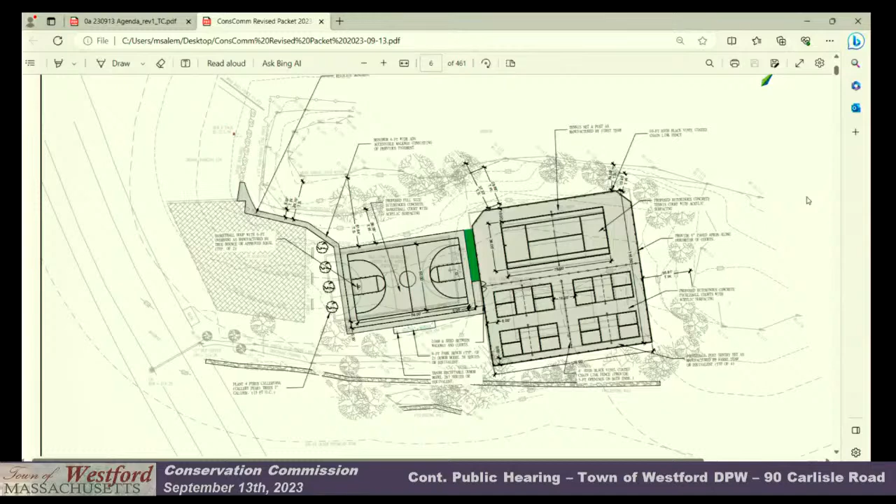We would ideally like to do it here, but there's just not enough room. Unfortunately we're going to remove these trees, but fortunately we're going to replace them, and this is the proposed new location of the trees, if that works for the commission. Those are relatively the extent of the changes.

On C6, the next sheet, the only change is that we modified the elevation at this corner because now we're pulling back a little bit to the original location, so that elevation number was changed on this plan. Lastly, we identified all the distances to the wetlands. You see a TW for to wetlands and a TS for to stream, and those measurements are from the closest point at each location, which was also at the request of the commission, which was a good request.

I think I've covered really the changes requested. I don't know if the commission had any questions.

So I have one. We had talked about maybe doing 3 pickleball courts before and reorienting because we were concerned about how close it was to the flag up in the corner here, and I don't know if that had been reduced since the last plan. Looks like it's still 19.5 feet from the edge of the chain link fence to one of the flags. Am I right? To the stream. Wasn't that where we were before, or were we closer? I think it's closer, if you look on the plan.

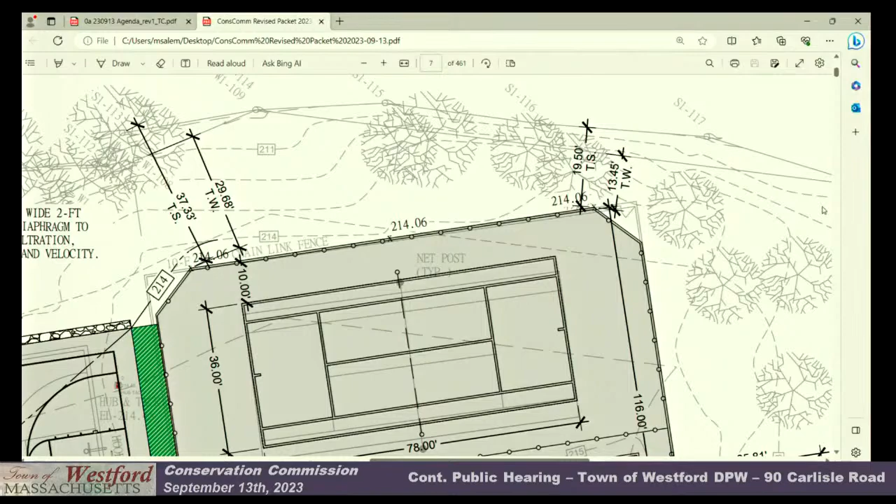The existing courts do come to a point, a 90-degree corner, so that certainly is closer to both the wetland and the stream. Is that paved court right there the existing one? Yes. The light gray is your existing court, and we did shift this down so that the new court matches. It's hard to see on this scale, I apologize, but we've clipped the corners of the court to try to reduce impervious surface on that side.

The 4 trees being planted, were those the Callery pear trees? Is that what you're planning on putting there? That's what was suggested, that's what was on our plan. We have talked about trying to identify species that are in the town's invasive and tree management plan as potential species we could use. This was what was recommended, but those are a non-native species, so generally we'd like to have a native species put in there. Okay.

Is there a particular species that the commission would recommend? What are the ones being cut down, maples, oaks? I don't know offhand, but Matt, do they know?

Do we have a list of native species? At this point, does the commission have thoughts about whether we'd want a deciduous or an evergreen tree, in terms of screening and wildlife habitat? That would probably be better for maintenance, since you're going to have leaves everywhere if trees are that close. Yeah, maybe some kind of evergreen.

Or let something make the choice, as long as it's at least indigenous. In working with our resident pickleball players, they do like the proximity of the trees to the courts because they say it helps keep the wind down, which can impact play. So I think an evergreen, over time, will help establish that barrier.

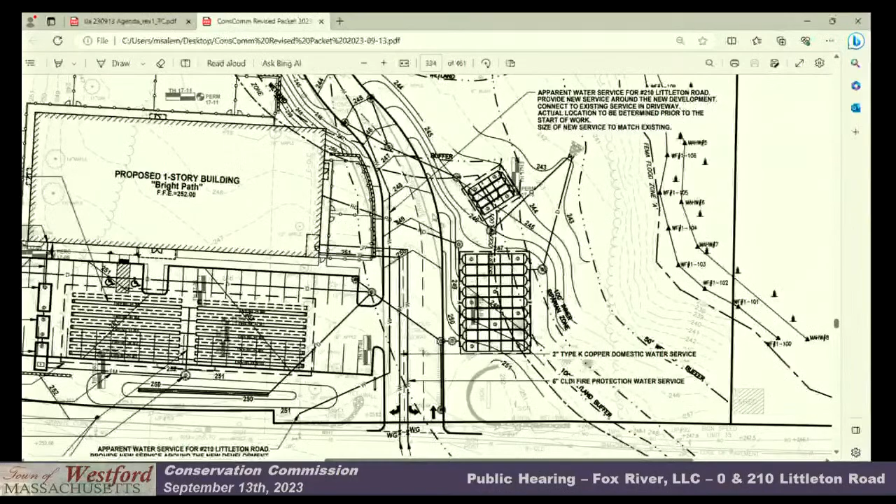Can he shift it and not do that? Is it possible to either shift it or replant closer to the wetland resource, or further to the south, in this area? Just explore whether there's the opportunity to achieve the same infiltration and be able to put it there and save the trees.

What about if we were to leave it where it is, but then plant new trees between the infiltration system and the buffer zone, right through here? That's where those slopes are, we could do it at the bottom of the slope.

Whichever the commission would prefer. We can look at moving the system closer and leaving the trees, or would you rather leave the trees that are there? They certainly are mature trees. I don't have a preference one way or the other.

Well, maybe we can explore the opportunity. We'll look at it, look at the trees, see what we can do, and propose something. I think what would be helpful is to have an inventory of what those trees are - the type of tree, the caliper, so that we know what we've got.

They are labeled at the species level, you know - apple, oak, pine. So it would be mapped by size: 20-inch pine, 12-inch maple, 16-inch maple, and a good mix of more mature sized trees. Those are good trees.

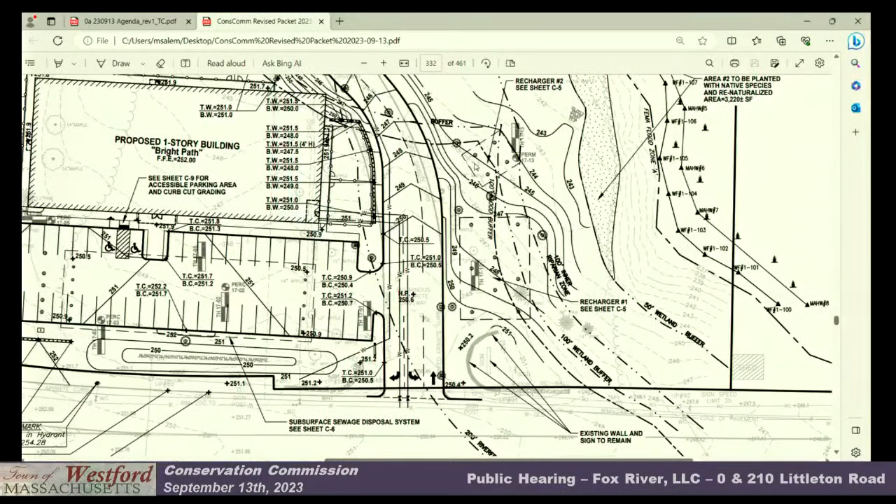It begs the question with some of the larger trees - if we're moving the rechargers, can we move it far enough away that it's not going to impact the root network for some of those trees? That's something else we have to look at too.

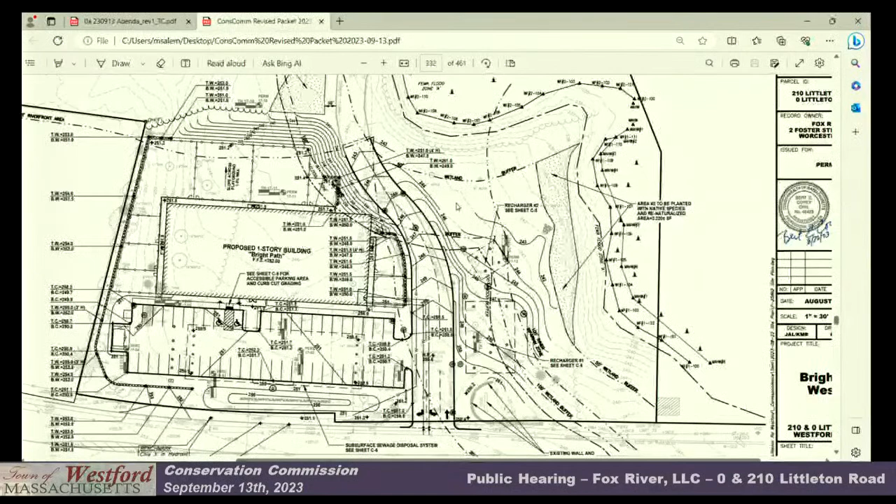In terms of when you come back to see us next - I believe we're slated to meet with the planning board on October 2nd. I know there's another Conservation Commission hearing between that meeting and tonight. I think we should probably wait until after we meet with planning for October 11th. Yes, the meeting following would be October 11th, and if needed, we can continue from there as well.

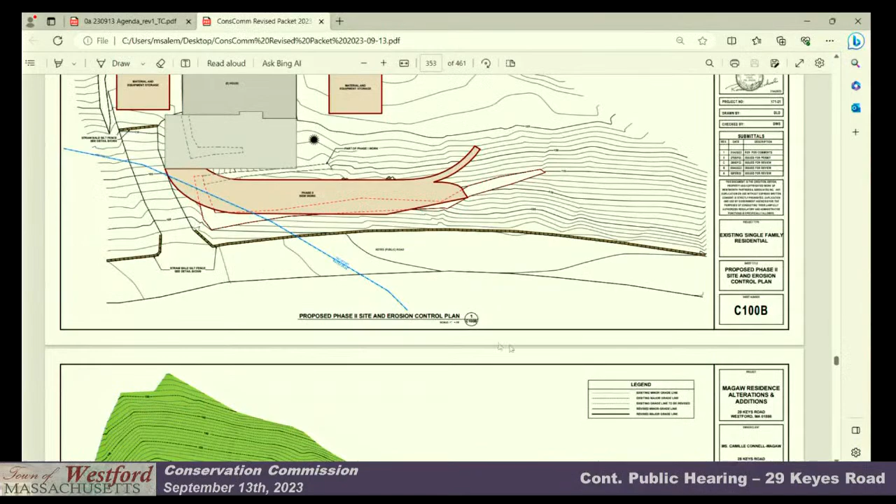It is not going to be a poured concrete wall, but rather it's a block wall with a finished face on it, or a stone face, finished type of face on it. And so that gives you all the details of how this wall will be constructed.

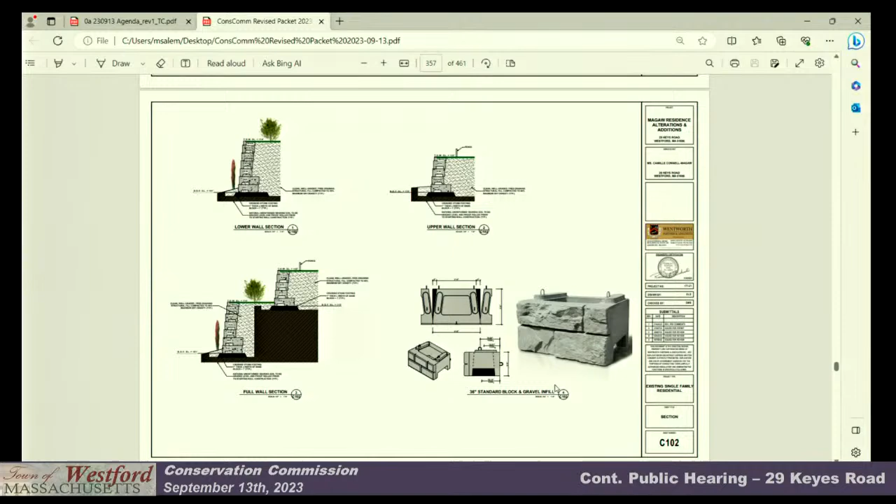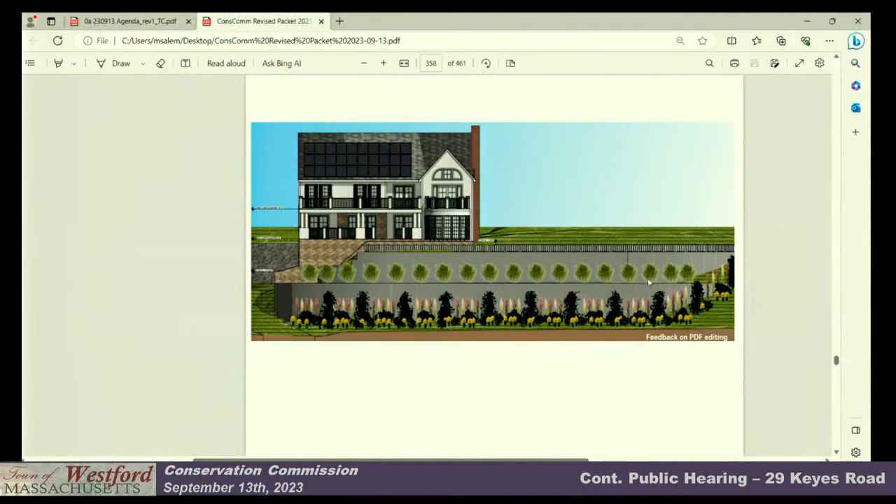We did update and revise the landscaping plan, which I believe was in conformance with what the commission was looking for. Did we provide a breakdown of those plans? Yeah, there's a breakdown of that. They're actually called out on another sheet that I think didn't get sent through to you. Oh, there it is, sorry. There it is, great. Yep, so they're all called out. So there's some more, each different details, tree and type of plant and bush.

I did also, Matt was kind enough to send us a draft of orders in the event the board is ready to do that. We've reviewed it. My client had one question concerning the phosphorus prohibition. She told me her only lawn is in the back of the building, and so she was wondering why she would be restricted. I did explain to her that it's a town-wide program. We're trying to restrict phosphorus, and while the lawn might not be in the buffer zone, clearly it's uphill of the resource area, so anything you put on your lawn could move. So other than that, she was fine with the conditions as proposed, and Dan and I are here to answer any other questions you have or provide any more information you want.

You had some other, could you slide it down? I think there was another picture or two you had after this one. No, not this one. I think, there you go.

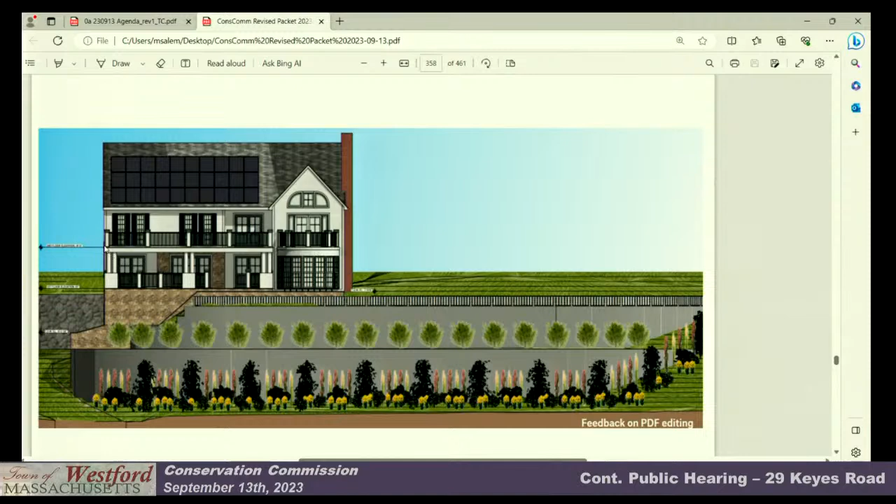If it were, again, I think it was included in the previous, with the original opening of the public hearing. The plan utilized for the variance in 2021, 2020, 2021, just showed the addition, the front addition and the porch. So the planning board has not seen the modification, I think it would be the zoning board would have.

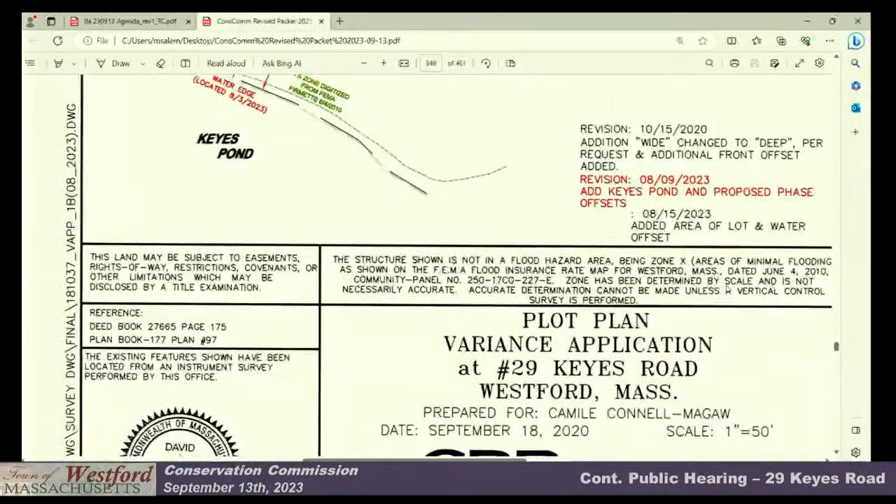But I'm just saying, at the planning board at the time, when they proposed what was being done, the improvements on the front of the home, there was no discussion at that point with the planning board for these retaining walls? The zoning board of appeals - if I recall, the zoning board of appeals plan, which this is based off of, this plot plan's based off of, the original submission that they reviewed was this grade area, the proposed porch, and I think it was just the porch and this addition.

Because there were two encroachments into the front yard setback as proposed, and then there was that proposed block wall right there. That wasn't included. What the zoning board of appeals reviewed was this grade-in area here and the circular addition. The proposed concrete, this phase one wall, nor the two additional block walls were included.

Variance for front yard setback? In the relief for the front yard setback. So, with the two walls that are in essence being reconstructed by this proposal...

Does the fact that the new walls are slightly different than the original walls play into needing a front setback relief from the front lot line? Relief from the front. Yes.

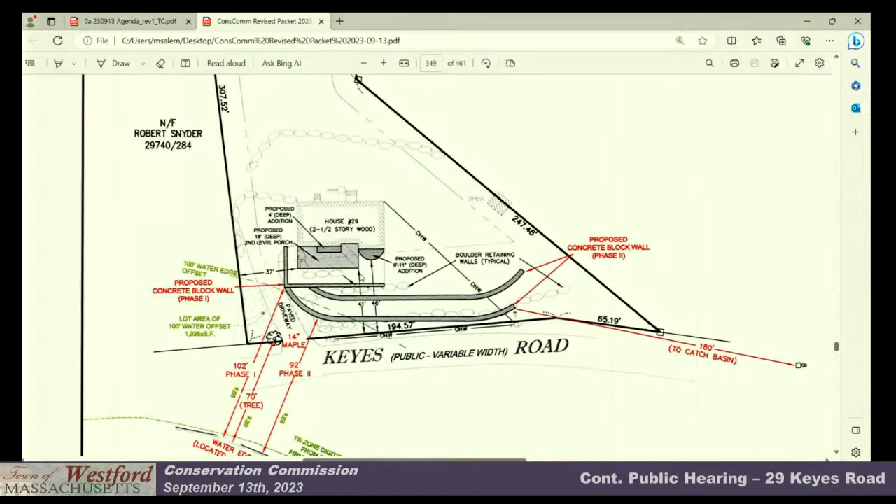But where the phase one proposed concrete block wall is, is there anything in that location today? There's a retaining wall, stone, boulder walls up in this area that create what was intended to be a staircase that comes from the driveway up and brings you to the front door of the house.

But the stairs are non-existent. It's just steeply sloped grade with grass on it right now, and then the boulder stone walls are there in this area.

And then this wall here is really part of the patio and porch addition off the front of the house. So this is like hardscape landing off of a stair, shown on some of the other sheets, and then you continue to step down and make your way down to the driveway. So that's the one right there.

So this is that L-shaped wall here, in order to break grade and provide the structure to build all this up against and bring the steps down, then a flat spot and a landing, then slopes down and meets the driveway here by the garage doors, level with this space. That's all in phase one, and that's the upper boulder walls there that would come out in phase one. The lower wall stays at the end of phase one—it doesn't get touched as part of the first part of the work.

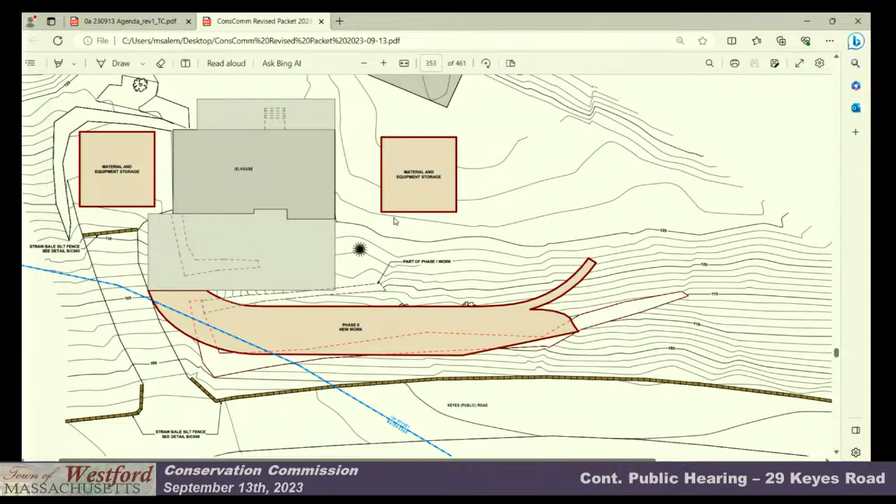While we're here, all these plans show Keyes Public Road. Are the edges of that the edges of the right-of-way or the edges of the paved surface? This right here would be the edges of the paved surface, right along what we're outlining here. Now, Matt, can you go to the final?

My concern is looking at how close to the edge of that paved surface a lot of that landscaping is, in terms of snow being plowed, pedestrians, vehicles maybe needing to pass. I'm wondering if this design really provides sufficient space between the edge of the planting and the edge of the pavement for cars, pedestrians, whatever have you. Yeah, it concerns me that the plantings come that close.

There's some space there existing. So this is a proposed idea of what you could do with some plantings there. I know from last time some of the conversation was around trying to beautify the wall, if you will, with plantings. So that was a preliminary stab at doing that. She doesn't have a final landscaping plan at the moment, but it would be along these lines.

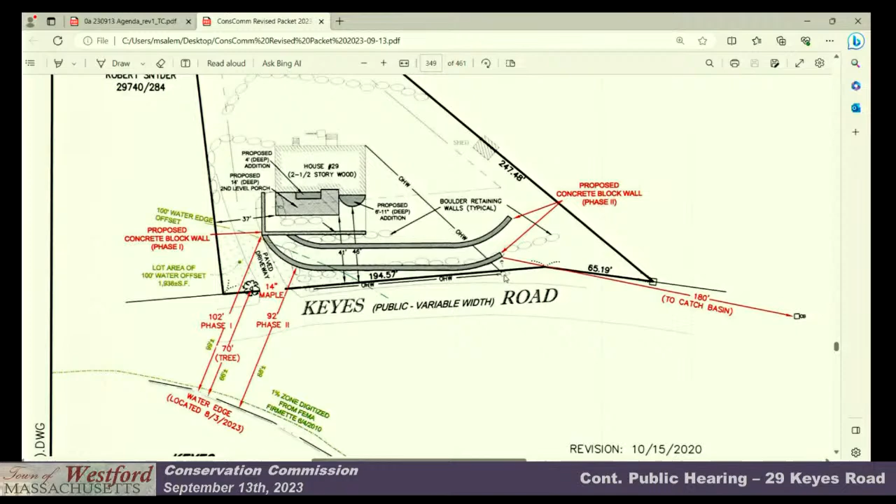So plantings over here at this end of the wall would have to be worked in to obviously not go over that line. And this is where we're really looking for a plan that can be handed to a contractor who's going to manage this work, and that person has the information they need to deliver the project the way we've all discussed.

Looking at a lot of these plans, there's not the detail that gives me a lot of confidence that you hand this to a contractor and they're going to be able to deliver the project the way it's being discussed now. This is where the plan of record that the contractor is going to use becomes very, very important in terms of knowing where they plant, knowing how things are structured.

The other thing that concerned me - Matt, if you can go back to the end of phase 1 - is we understand that there's going to be a time delay between the end of phase 1 and when phase 2 starts. I look at these slopes, I look at where material and equipment is going to be staged, and I am very concerned about the stability.

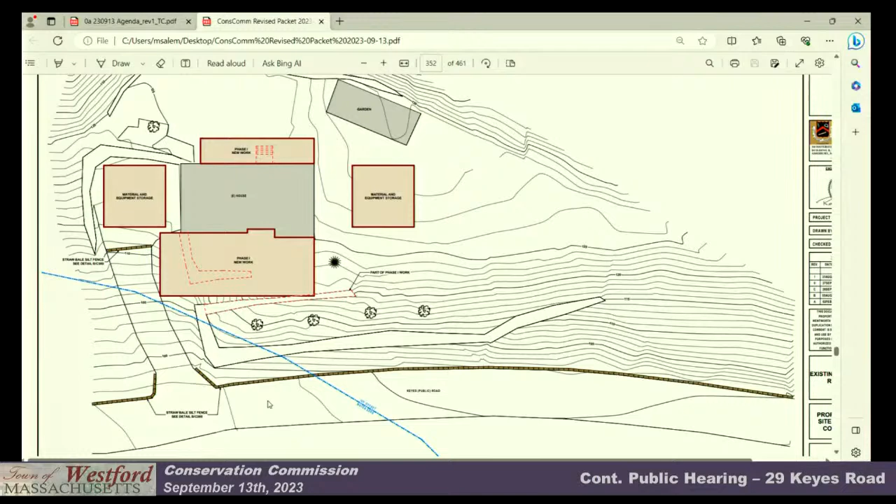If we have significant rain events, if we have the kinds of things that we've had happen on this hill, I don't really want to rely on a series of control measures along the edge of the road to really prevent a catastrophic release of material going into the pond or into the roadway or wherever it goes. It hit the neighbor's house before it hit the pond.

One of the things you hit upon is, it says in order of conditions number 32, it talks about the disturbance during each phase. And one of the questions I had at our last meeting was, okay, how are you going to do this? How are you going to remove those boulders? How are you going to build the blocks, put the blocks up? How are you going to stabilize that? How are you going to move forward as you do the project?

This isn't answering my question. This is just saying, hey, we're going to come up with a plan that can be approved by the commission or the agent, but I have to approve that as part of the order of conditions and approve the project. I want to see that before I approve the project.

That's a good point, because you had brought that up at the last meeting - when we're taking out the boulders in a 10-foot high wall, what is going to be the step-by-step sequence that a contractor is going to do to make sure that all the soil behind that stays in place, that we don't have a catastrophic failure? It's like when we cut into a road, when the town does that, they talk about the steps: we're going to do this, we're going to put this there, we're going to backfill, we're only going to go so far.

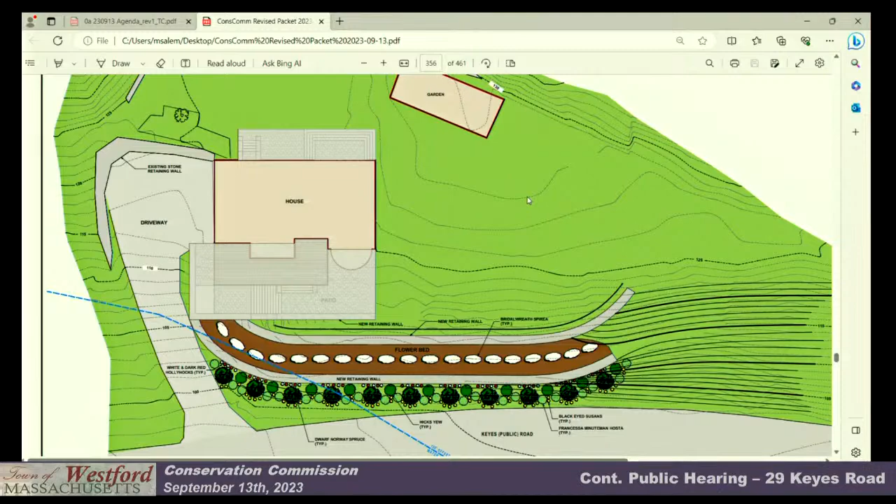I think I have a pretty good understanding of what you want us to do, and I think we can do it. So, we'll see you in 2 weeks?

Will that be enough time for you? We can certainly continue it if we have to. I think Dan and I can sit down and draft most of this up. I do want to get some additional information, and I'm sure we have it, we just want to show it better, and that is the right-of-way versus the pavement versus the property line.

So we can look closer at that landscaping, and maybe we give Steve a call and just see what the DPW thinks about that and what they want to do. But it would be good to do it before.

You guys will have to understand, though, that if Steve comes back and says he doesn't want any big trees in there at all, if you can help it, it's your property. We will have to back down on the trees down there and talk about putting in something more conducive to what they probably want trees somewhere else, so think about that.

Well, but if the concern is screening the wall, okay, maybe the screening of the wall needs to be reconfigured to meet the requirements of what DPW's criteria are.

Yep, that's what I mean. Looking at what I've seen, I do think there's room to get some trees up against that wall, which would do the best job of screening it, and even if you put in a 7-8 foot tree to start, it's going to have instant effect, it's not like we have to wait 20 years for a tree to grow to give us some buffer. An 8-foot tree against a 10-foot wall is really going to break it up right away, and maybe the species is such that it won't grow to 20 feet.

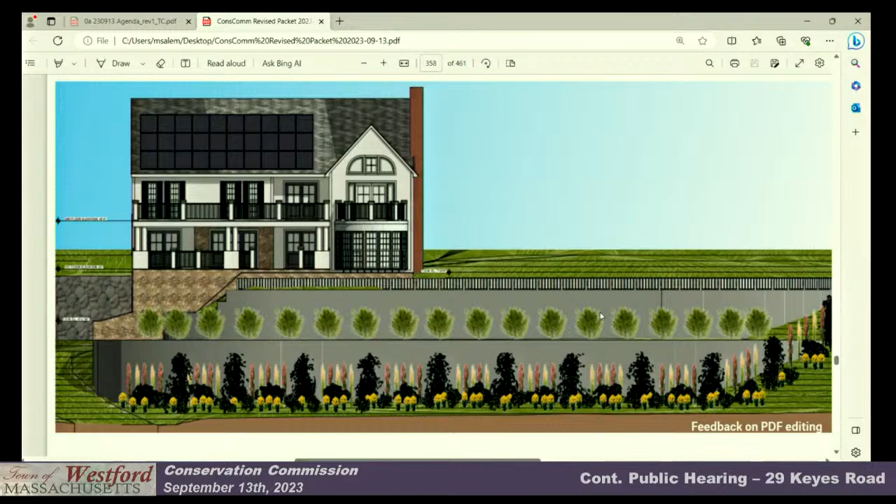What was there, some variation, sort of Norway spruce? The only one listed that's native is the black-eyed Susans. All the other ones are non-native invasives. Well, then we need to revisit that. Non-indigenous, not invasive. Yeah, I'll take a look as well.

Okay, we'll address that. I have enough to think about. All right, we got a lot to do. Any comments or questions from the audience? Welcome back, Doug. That's great.

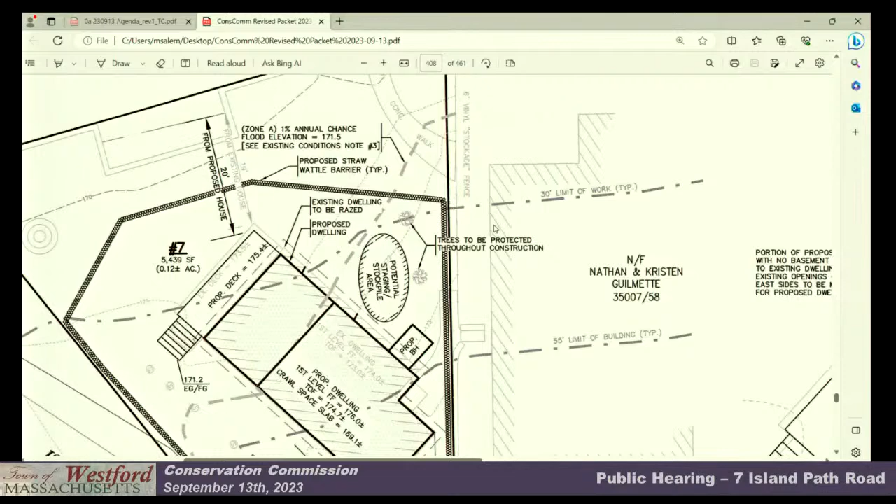So again, the existing building is proposed to be removed. The homeowner would like to update the house to be more up to date with current building code standards, and per conversation with her site contractor and the building commissioner, they're both of the mind that the most feasible and best approach would be to demolish the house in place and then construct the new house in the same footprint. The existing house would be removed, and then a new foundation wall would be installed within that same footprint.

There's an interior foundation wall, so there are 2 separate crawl spaces over here. This one to the south would be a little bit deeper and provide more storage space for the owner, but this area would be a designated flood storage area. The existing house has several openings along the northerly and easterly side of the foundation to accommodate flood waters from the flood zone A, so we would be trying to keep this same practice in place. The foundation proposed would have openings along the northerly and easterly side within the floodplain as well, and this area would just be for that flood storage.

No vegetation removal proposed. Is it open, is there a concrete slab underneath? There would be a slab underneath, and the openings would have a lattice in front of them.

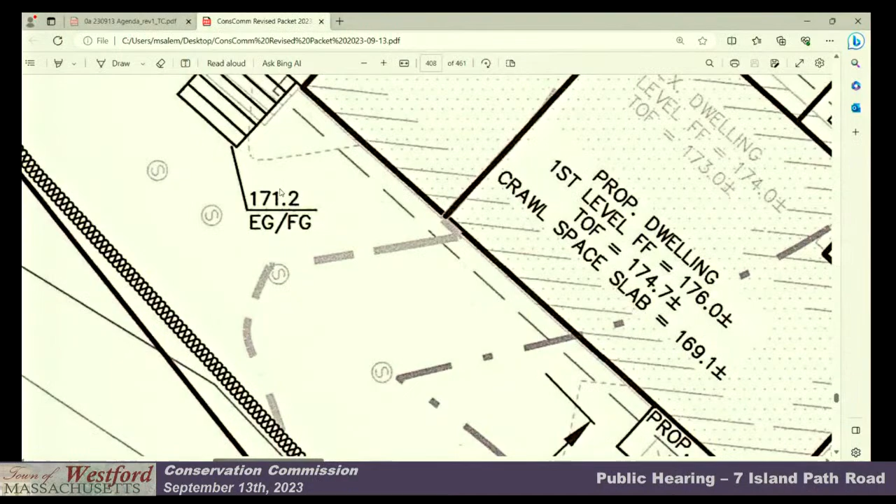Correct, and I think it is. There, you go. There's covers that were identified. I'm like, there's something, I'm sure they showed it.

You're going to be able to use that staging area up there? You're going to be able to drive around the house with construction equipment? You'll be able to come in here, but you won't want to drive over your tank, right? Or, I guess, there's actually enough space from the top where the porch is, I would think, to be able to get around to that top area. Yeah, in that area there.

Yep, I mean access could be here as well. But, similarly to the previous public hearing and discussion, this could be a laydown area for lumber, light stuff, materials, or when there's no house in the way.

I'm fine. I just have, as Jim alluded to, where the preliminary floodplain flood insurance rate maps have not been adopted and are not yet effective, if the building is constructed prior to the adoption of those maps, they would need to construct it to the effective maps code. So while it is a more conservative approach, it does comply with building code if work was to occur over the winter.

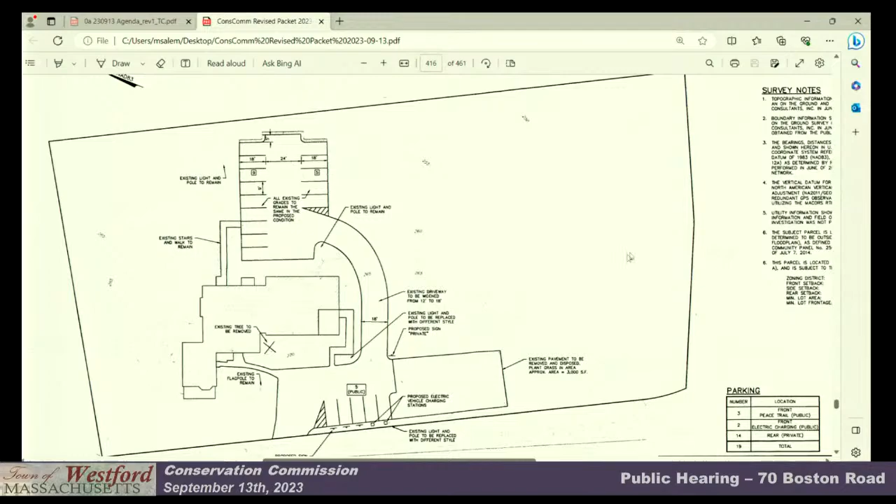Although the work will be entirely interior renovation with no new construction on the land, the Director of Land Use Management asked us to have a new site plan done because the last one was dated 1993. In doing that, without my knowledge, Land Tech suggested this new drainage device at the rear of the existing parking lot to utilize best management practice and control runoff. But it does intrude 10 feet into the 100-foot buffer zone. At your meeting last month, you asked that we come back this month for a public hearing with your input and public input, and your consideration of our request for determination of applicability, which brings me to you tonight.

The two things we did ask Land Tech to do was to reflect that we will be taking out a substantial part of the parking lot on Boston Road, which reduces stormwater runoff back down the hill behind the building. To be perfectly honest, I defer to you and to Land Tech as to whether this drainage device and the 10-foot intrusion into the wetland is a better way to have this property. We will do it if you suggest it. We can certainly live without it, because it's been that way since 1865, but the parking in the back has only been there since the 1994 renovation. So I turn to your expertise as to how we should proceed from here.

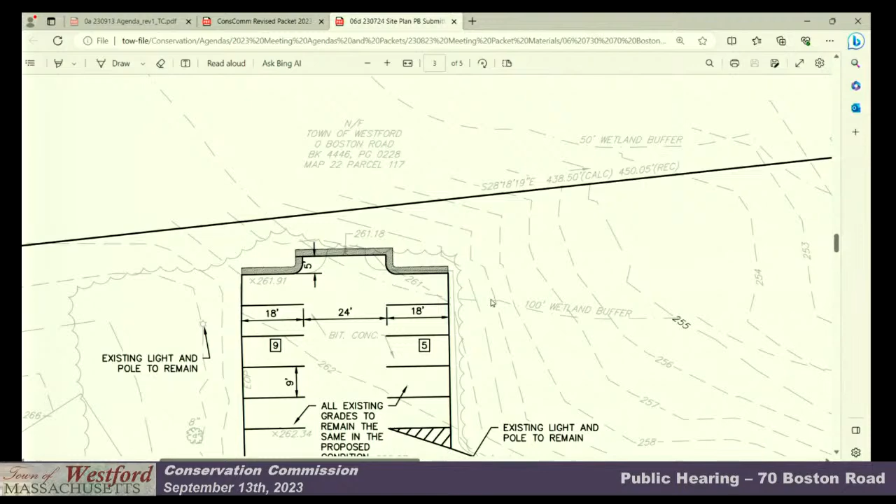This site plan is a little bit better than the one in the packet—I think some of the grays got washed out. The grayed area is the stone, meant to defray runoff. There are some minor changes, just the turnaround radius is probably adjusted more to today's standards as opposed to however it was likely installed when it was.

Certainly the stone diaphragm, I feel, is a worthwhile improvement that slows down runoff and also infiltrates some of it prior to continuing north onto the town's land and the wetland shown, as Ellen said, 90 feet away. So I think this is an improvement for the buffer.

So it would also keep snowplows from taking out the grass at the edge of the pavement? Maybe, I don't want to make any promises. But yeah, it's something we see quite often to improve conditions at the edge of a parking area.

Any members of the commission have comments or questions? You're going to have a nice sidewalk there too. Won't that be just sort of icing on the cake? The fact that it will be going on just as we're finishing up our construction.

Just for the commission's consideration with respect to a negative determination, one condition may be to permit the maintenance of the stone infiltration in perpetuity, so there are no questions asked as to its upkeep. Well, then it's a conditional negative. I like that better.

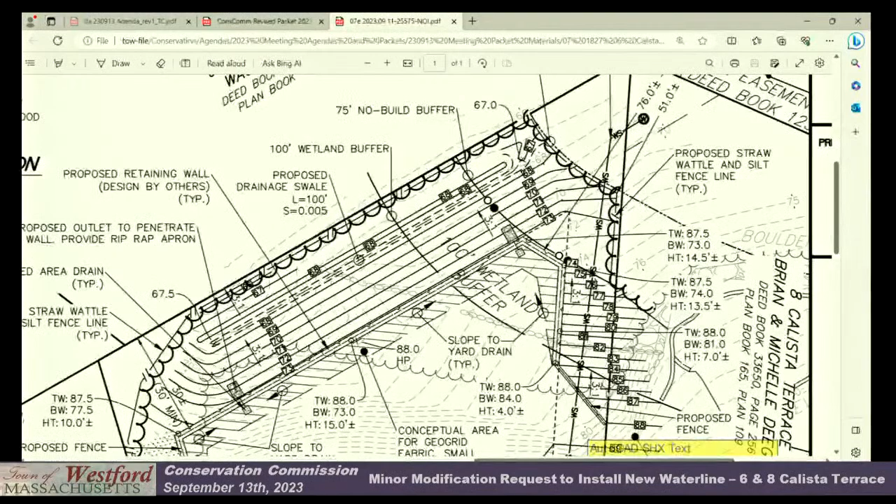Good evening, for the record, Russ Tedford with Hancock Associates. We were here previously for both 6 and 8 Calista Terrace for backyard improvements. There's a resource area off property, but the 100-foot buffer, the 75, and the 50 are all cast on our property. We are here to propose a new water line.

Just to give a status update: the erosion controls are in, tree clearing has been done. While doing the tree clearing, they investigated the status of the water line and found that it travels under the portion of the wall that's 13 to 14 feet high, and goes into the back of the building. Before they start any wall construction, they need to replace and relocate that line to a more feasible condition in the event it needs to be replaced.

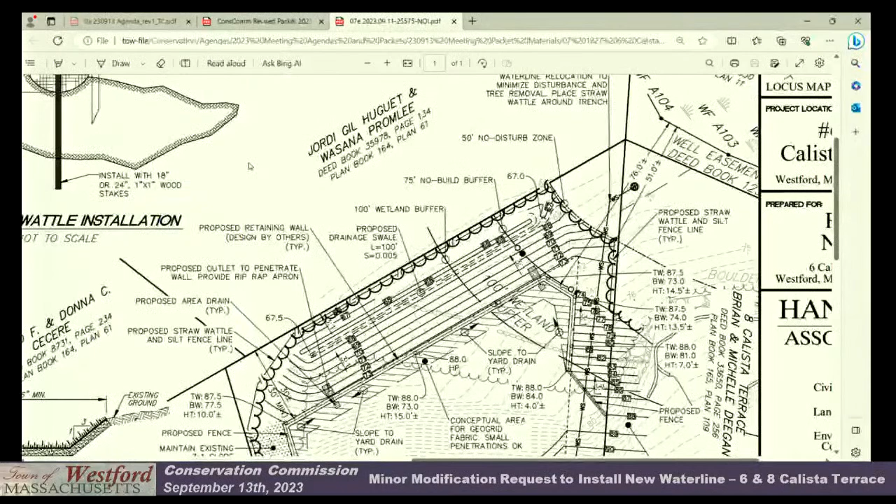So the proposed relocated line is going to come along the property line here, traveling under this wall, but this wall is only 4 feet high. Its blocks are a lot smaller than, say, the 14-foot portion—these are only 2-foot blocks that, in the event of replacement, could be easily facilitated.

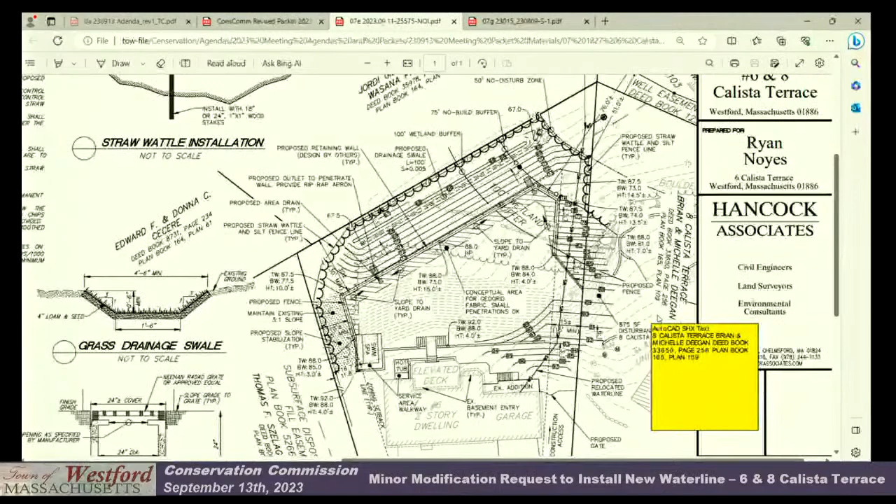Another update, because this plan looks a lot different than the approved plan. The approved plan had a larger pool over in this section and substantial flat work. The owner priced out that plan and it was not within his budget. So this is a revisited concept: a smaller pool off to this side, and then leaving the majority of this to be manicured lawn. That sums up all of the changes here. I'm here for any questions you may have.

Comments or questions from members of the commission? Matt? Nope, go ahead. I'm good. Okay, this is it, everything.

So, members of the audience, can I have a motion to approve the minor modification request to install a water line? So moved. Second. All those in favor? Aye. Thank you, thank you. Thanks for your patience.

Moving on to our agenda item to ratify the emergency certificate for the Town of Westford Department of Public Works, East Prescott Street right-of-way.

I can speak to this. The Director of DPW, Steve Cronin, reached out to me Monday morning and was not in a great mood, because, as seen in the Assistant DPW Director's email regarding how it was going to be repaired, a 20 by 20 by 15 foot sinkhole developed off of East Prescott Street due to a blockage of the culvert that runs under East Prescott Street. Long story short, the granite curbing for the side of the road was exposed in that 15-foot sinkhole. They wanted to repair it with emergency certification, due to its threatening the condition of public safety. I issued it, and in speaking with Steve today, they've made good progress, slower than anticipated, but they've installed erosion controls. They're protecting the outfall for the existing culvert, and they feel it will be in better condition and don't anticipate future issues with this repair.

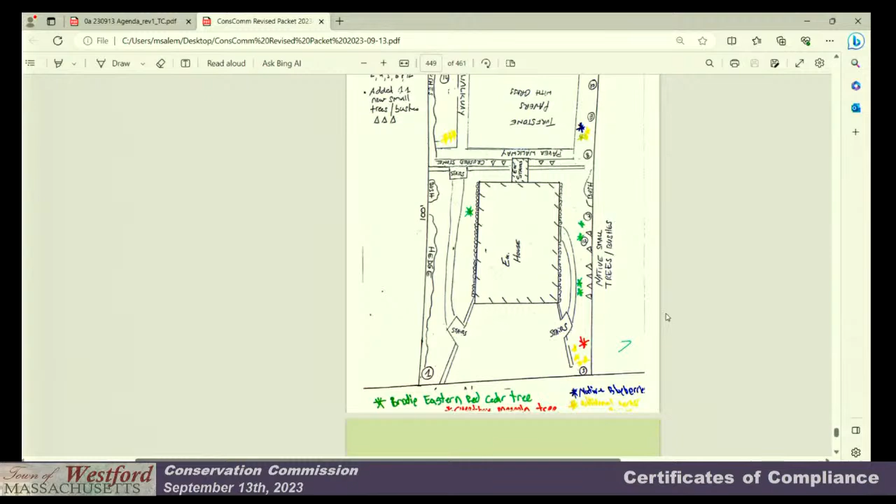So I would recommend issuing it, and I do recommend issuing it, and it is in substantial conformance with the approved plan. But I'm not going to send it to them until they can verify that the erosion controls have been satisfactorily removed from the site. But the site looks good.

Can I have a motion to issue a certificate of compliance for DEP file number 334-1785, 28 Lakeshore Drive North? So moved. Second. All those in favor? Aye. Aye. Minutes for August 23rd.

Now Matt, did you remember, I had asked, because I had thought that there was going to be the potential for future compliance inspections at 31 Bridge Street. I didn't review the meeting.

But within the order of conditions, it does allow for site visits to ensure compliance. So I think we certainly discussed that. I didn't recall, I didn't see anything explicitly in the actual order of conditions, but there is the general condition that does allow for site inspections.

At the very least, we should get a copy of whatever paper Mr. Franklin gives his tenants, and then we should check. Right, that's on - I set that calendar reminder.